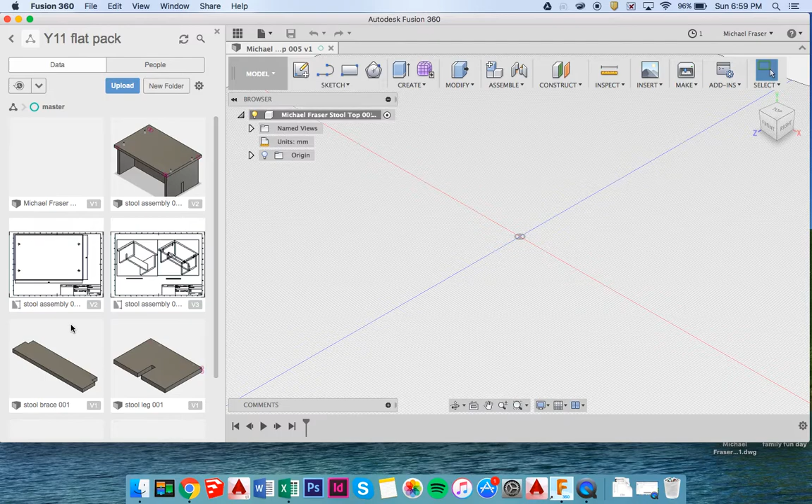So here we are in the main screen for Fusion, and for the stool top, we're going to be drawing the top view to start with. We just click on top, and that spins the screen around so we're looking down on top of the drawing. We're going to start with a rectangle, so click on the rectangle, or use the drop-down menu to get a rectangle. It's going to ask you what face you want to draw it on, and you just click right here to show you're drawing on the top face.

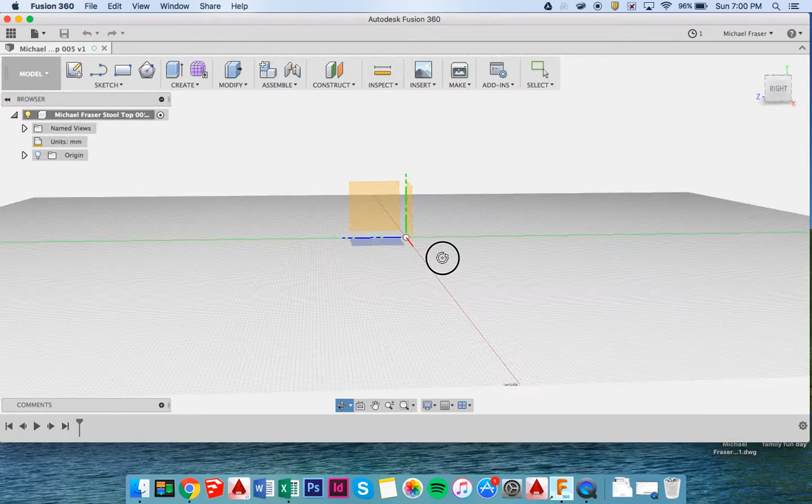I'll just orbit that around a little bit. See that we're clicking on that surface there, the top surface—that's the surface we want to draw on. So click on there, then click back to top so I'm in the right place. I'm just using two fingers to drag, and if I want to zoom, I can pinch like this.

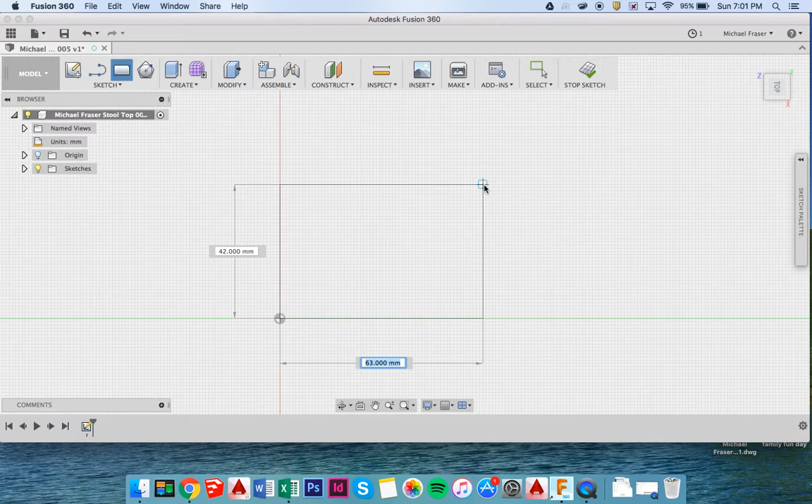So I'm going to start my rectangle. I'm going to start in the center and drag. Now you can see the box highlighted in blue. I'm going to type 300 millimeters into there, press the tab key to type 200 millimeters into the other box, and then press enter.

I can zoom down, and that gives me the size of the box, or the top of the stool. Now there's really only two other things to do: put in the screw holes and then extrude the thickness.

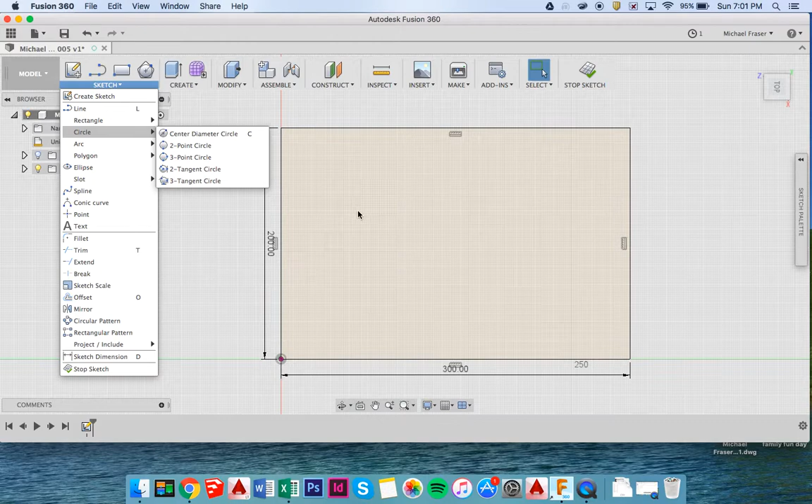So for the screw holes, we want to create a circle here, a center diameter circle. You can see the shortcut is C, so I just type C and it gets ready to draw a circle for me. I'm just drawing the circle in a random location up near the top left corner. The diameter is going to be 4, so I type in 4, press enter, and press enter again to lock it down.

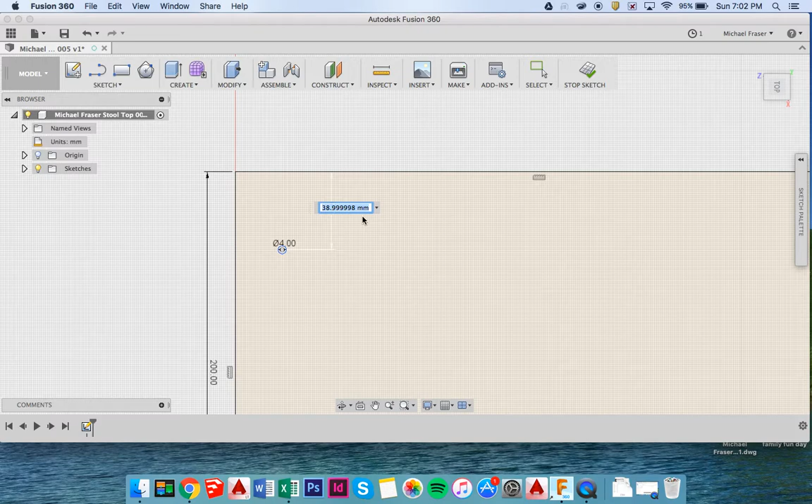Now I'm going to zoom in here for you. We need to lock this circle in the correct position using the dimension tool. So I click D for dimension, click on the center of the circle and then this line here, and it gives me the ability to drag out a dimension. I click down, the dimension says nearly 39. We actually want it to be 40, so I type in 40, and you can see it's shifted.

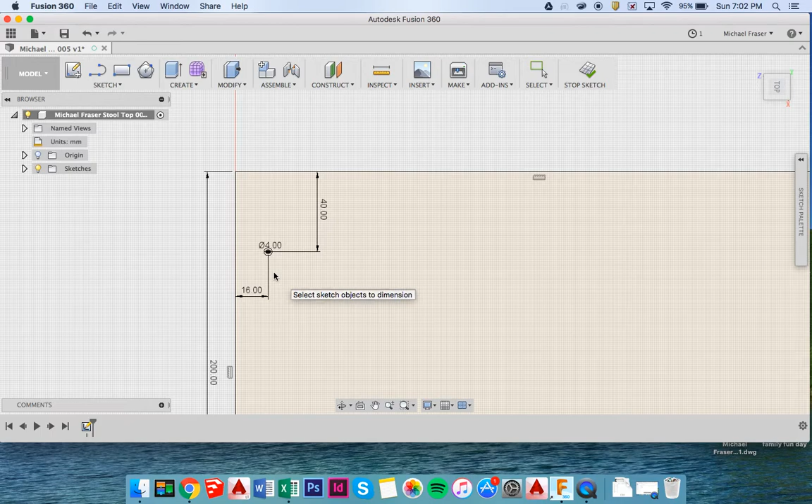Now we're going to put another dimension in, so D for dimension, center of the circle, this line out here, drop the line down. There's a bit of maths required: the distance to the outside of the stool is 10 millimeters, but you want the screw to go in the middle of the piece of wood that touches that. The wood is 12 millimeters wide, so take half of 12, which is 6, and add it to the 10, so the distance here is 16 millimeters. And that locks the circle in place.

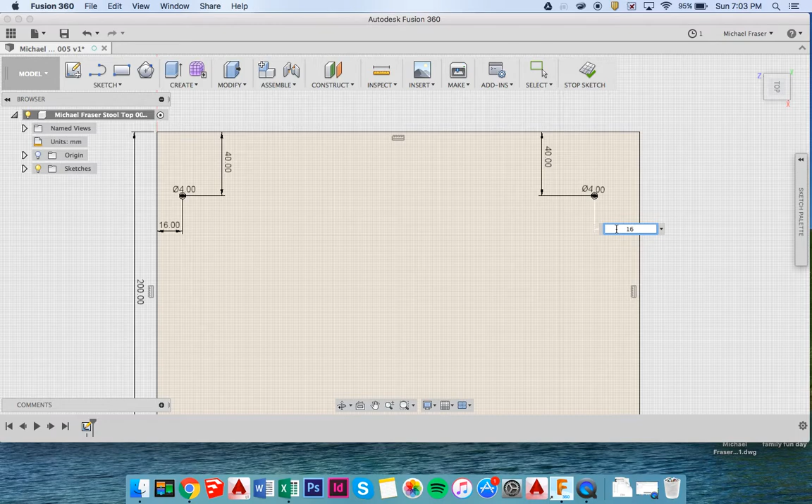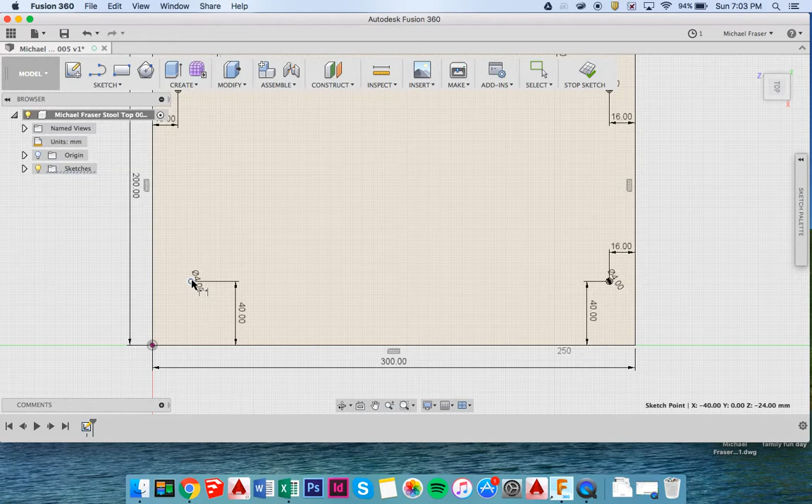Now you're going to get really good at this because you need to draw that circle in all four corners. Let's quickly fly through that—I'm just going to do it silently, and you can do the same. Okay, zooming out so we can see everything: we've got four circles for the drill holes, the screw holes, placed symmetrically in all the corners.

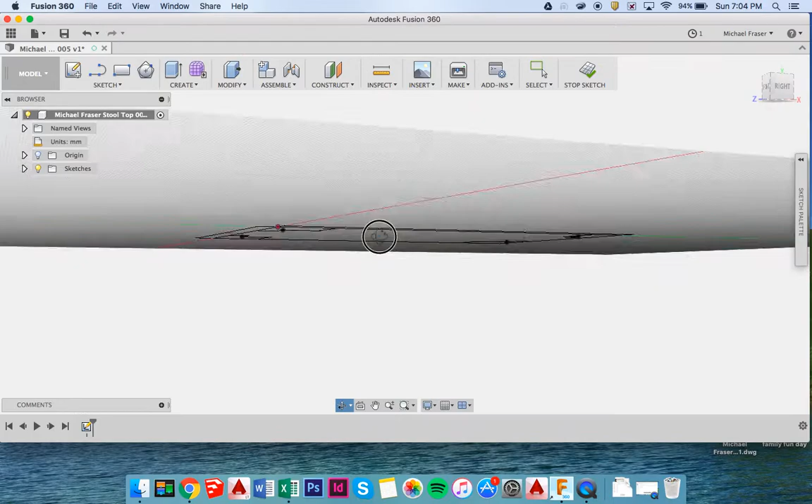Now really the last command for this drawing is to give it some thickness. At the moment you can see it's paper thin, so we need to extrude it. Under the Create menu we've got Extrude. Click on the surface, and we want to extrude it a distance. The thickness of the wood is 12 millimeters, so we just type in 12 and click OK.

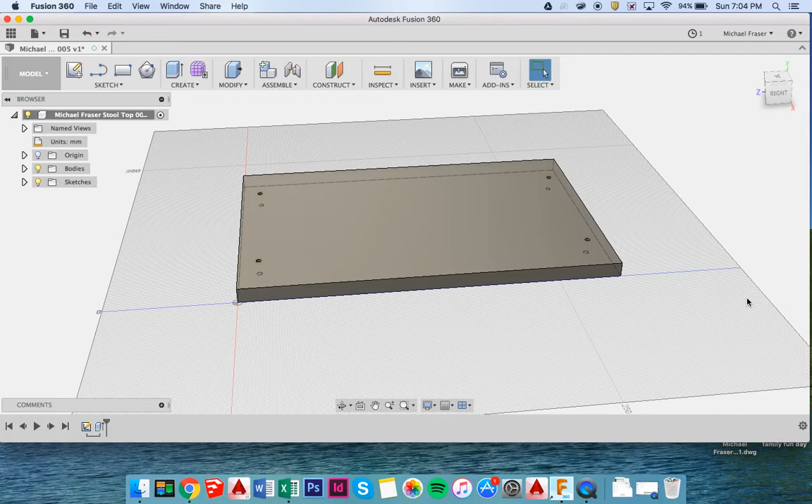Now if you get your orbit tool out, you can have a look at that and see how it's all drawn correctly, and you can see those holes have gone right the way through. If your holes haven't gone all the way through, we might need to have a look and see how we can help you.

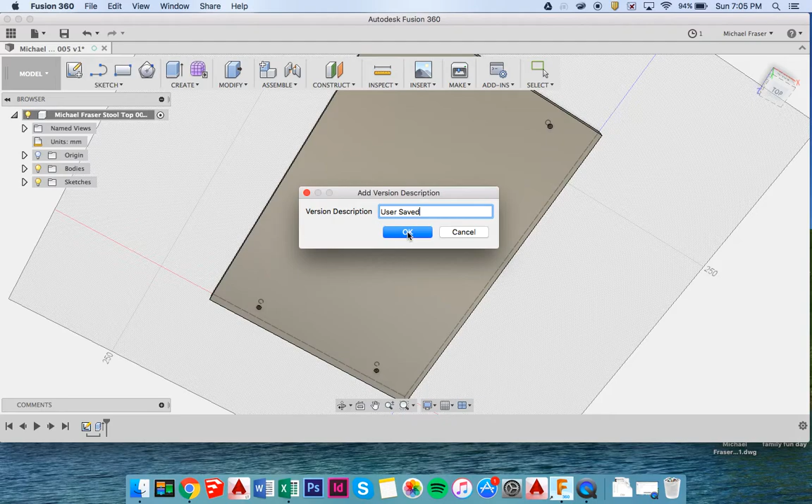Right, once that's finished, we're going to save it. This is okay to leave as user saved—it'll just keep updating as you go. You can see up here it's V1, so that's great; next time I save it, it'll go to V2. Click OK. And you can see the drawing updating up here in my Year 11 flat pack folder. So that's the finish of that drawing.

Next we are going to move to the stool leg. Okay, so that's it for this tutorial. You can start the next tutorial shortly.